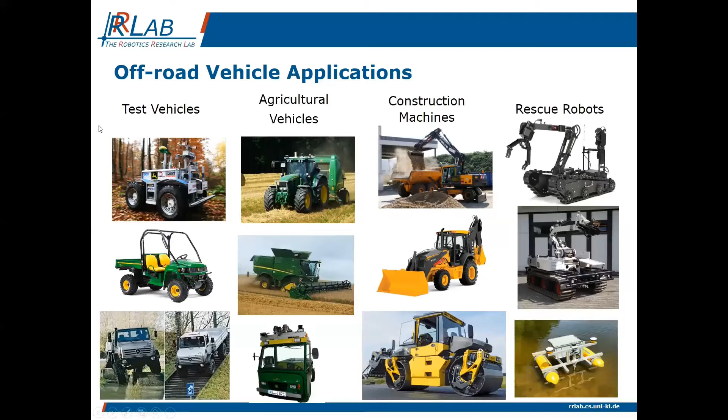Let's come back to the construction. I have here more or less an overview of things what in modern construction should be solved. You see more or less how people see the construction site of the future. So in this, we have, of course, a lot of interaction from the cloud, from different actors which like to interact with the construction site, get data or control the vehicles, deliver new tasks, get information which can be handled to find out if the planning process, what is done, is correct at the moment, and so on.

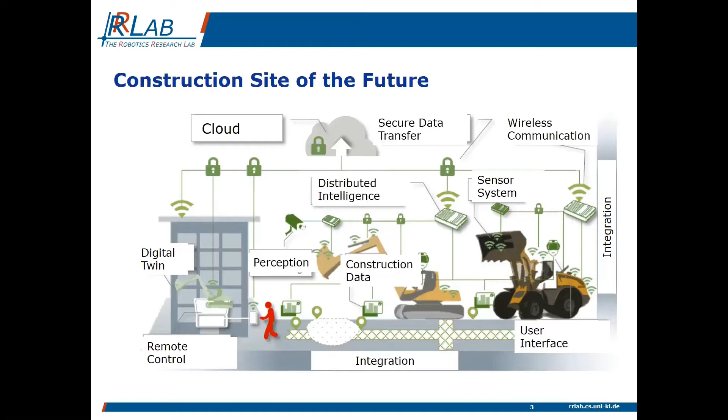So if you look at the middle, you have, of course, the things what we like to support. This is more or less the construction machines. They must be at least semi-autonomous. Otherwise, you will not have a nice production or construction in future. But also you should have on this construction site additional installed sensors. It's not only on the machines, but also we have cameras or other sensors in the construction site itself, which can also be used by the machines to operate in a correct way to get additional information and so on. So this is more or less the scenario in which we normally are.

And of course, you can ask, why do we need in construction now more intelligent machines which can do a lot of operation by itself. The reason is here more or less listed. We'd like to have in future a much higher quality of the construction process. Everyone knows, even someone who has built a house, how low the quality very often is, and how many problems arise because normally manual production is not done in a correct way.

Then we like to have, of course, a much higher efficiency. Think about the huge amount of houses which we like to build in future. There are, of course, countries like China which like to build in a small region more than 1 million houses in a short period of time. So even here we have to have a much higher efficiency than today, and we hope, of course, with such machines we can reach this.

On the other hand side, we like to reduce the resource costs like CO2, energy, and so on. So this is also a very important thing, even in our discussion here in Europe about CO2 pollution, that we have other techniques where we can reduce this. Of course, also on the other hand side, we have to be absolutely safe, even in construction.

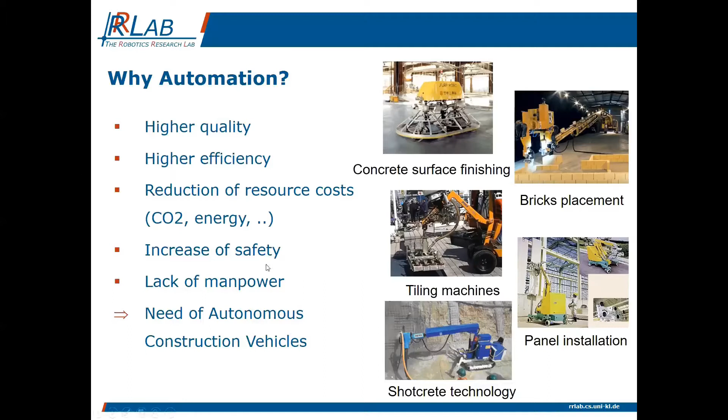But here the ideas, you see a few ideas: concrete surface finishing or brick placement. There were several machines built in the past - the tiling machine, shotcrete technology, or panel installation. These are typical robotic systems where you like to have a mobile machine, but also with an arm, something which manipulates in the construction environment.

The questions which arise, if you look for such type of applications as we have seen on the last slide, is how should we build such construction machines in future? And it's clear, if you have no human in the loop, maybe outside in a monitoring center but not on the machine itself, you need no cabin. So you can also produce, from the mechanical point of view, from the design point of view, the machines in a totally different way than today.

And you see here two examples. One was by Volvo, this mobile cart. So this is of course a truck, but as you see, a totally different structure of a truck. And we were involved in the development of this BOMAG roller, which is also not having any cabin and is also driving in an autonomous manner.

We also can ask about the mechatronics concepts and the embedded systems. How can we develop such concepts so that also industry can buy this at the end? Of course, if you look at our prototype machines, they are very often very, very expensive, so this is not a market. We have to reduce the cost of both the embedded system, the control system, but also the sensor system. At the moment, these prototypes cannot be sold on the market because the price would be too high.

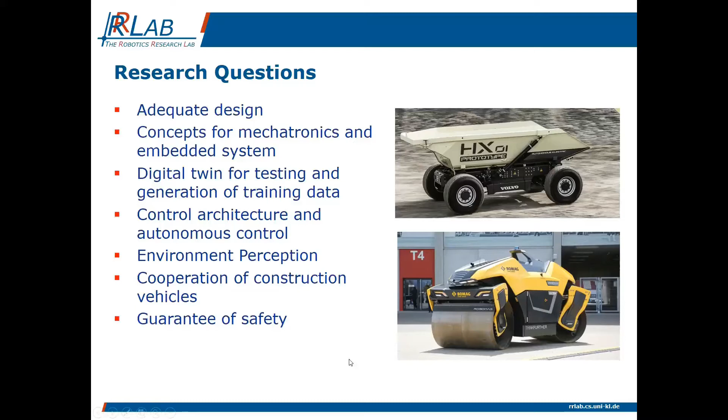So simulation, why is simulation so important for us? Maybe I can also run the video, hopefully it can be seen, these videos in parallel. We like to have simulation because it's impossible to test in a rough outdoor environment. You see here in a natural environment, but also in a street environment, our controllers, our perception system in an adequate way.

Because you cannot go out infinitely with your machine and test this - this is impossible. And everyone who has real machines and goes out knows that we can test only a little bit if we go out. And even if we are out for a longer time, what we really can test is nearly nothing. For example, if you think about perception, it's important if the light condition changes, if the shadow changes - we have totally different behaviors of the perception.

And we like to find out if even under these conditions, the system will work. On the other hand, we are also interested, as all people in the perception area are, in using deep learning networks where we have to generate training data. And we know that it is very hard to generate this training data.

We also worked together with Unreal Engine to generate directly such simulation training data, which we have, of course, not to tag ourselves. We can make this in an automatic way, for example, persons running around under specific conditions. We can also make snow or other light conditions or even dust, and test what the sensor quality is. This hopefully in future will help us tremendously. We have very nice first results where we can test or generate this training data.

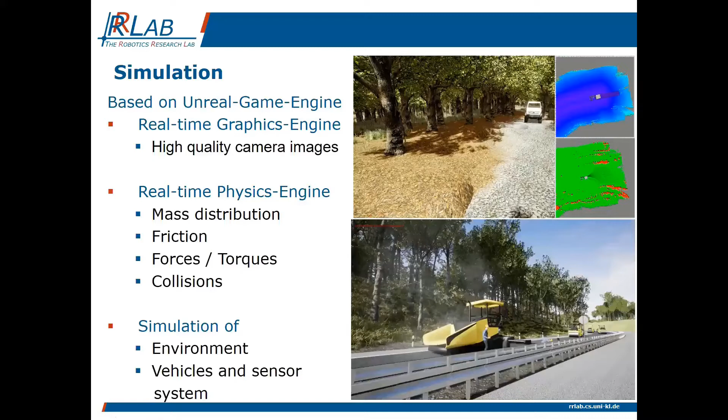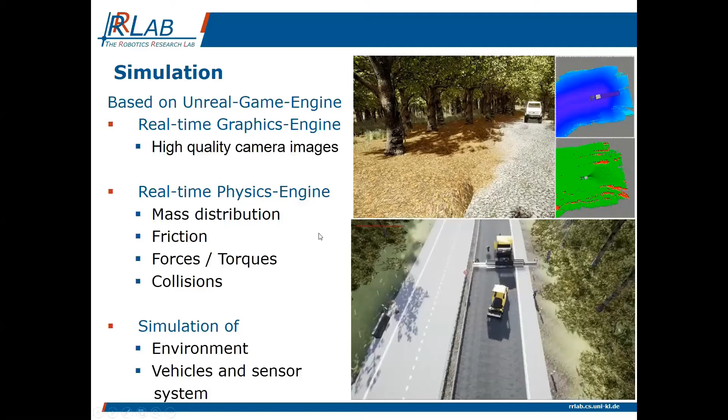We have a lot of environments in the meantime, with different construction but also agricultural environments and so on, where we can easily test and change the conditions. That's why we think without such a powerful tool, you cannot solve the problems I have listed before.

Coming to the control, I'd like to shortly introduce our concept of how we control our vehicles. We have a so-called behavior-based control concept and implemented years ago our own behavior-based language, called iB2C. We also have a middleware called Finroc which we use, not some other middleware. Both of course work together, but I'd like to show you here the behavior-based concept.

The idea is how we implement the percepts, the units which recognize the environment, or the controllers, which are on a low-level control but also high-level control, are these modules you see on the right side. The behavior model is first of all totally free in what we put in. This can be very complex, a neural network, or a very simple function. We say nothing about what is really inside this behavior box, because we also have to use standard algorithms we find on the internet, so we are totally open about what goes in.

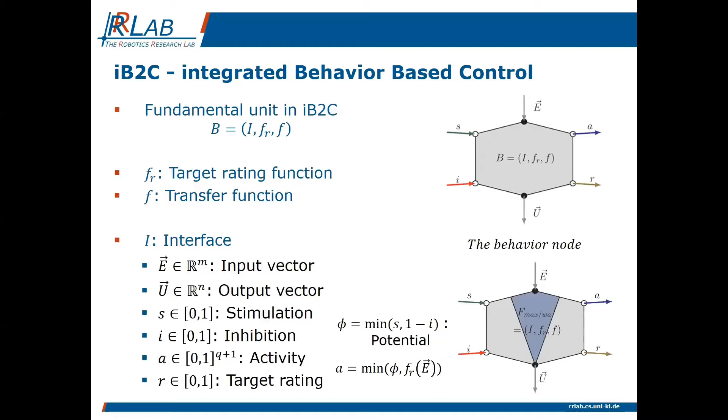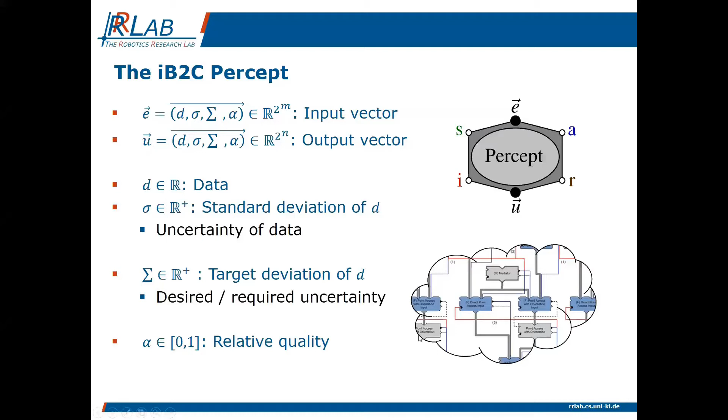We have to look at the application itself. If, for example, the control must not be too precise, and 1 meter is enough, this sensor is perfect, so this deviation is not bad. But if we want to navigate in centimeter dimensions, this deviation is of course terrible. So we consider this deviation according to the application itself and calculate a kind of confidence value, how confident this perception is, which is what we later use. Here, over this iB2C, we have now developed our REACTiON architecture.

This is also used in all of our robots. This has more or less a similar structure as all these control architectures we see in other robotic systems. We have, of course, here this typical control part, the red ones.

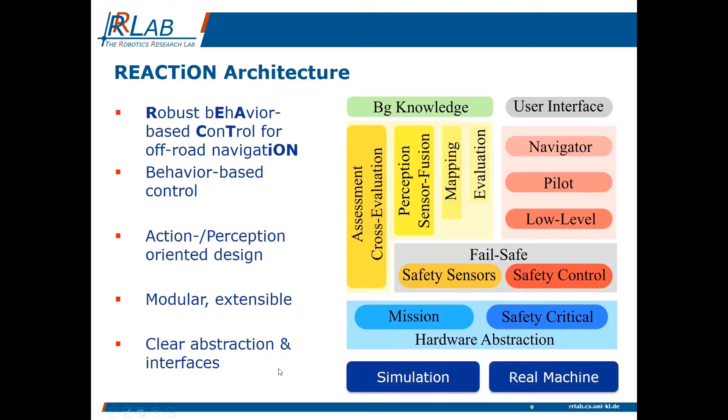We have the perception part, these are the yellow ones, where information from a database or knowledge can go in. We have then an abstraction layer, which can be used to control the simulation and the real machine. So all our algorithms can switch or run this in parallel, it doesn't matter. We can directly go to the real machine, to the simulated machine, or run both together. So this is the concept we have.

And I'd now like to say a few words about our Unimog. This is a typical transportation system for rough terrain. You can use it on a construction site, but also in forest or agricultural applications. We have developed this machine in the last 4 years.

We put a lot of sensors on it. You see a lot of laser scanners on it, but also a stereo camera system, and of course inclination sensors and so on, GPS and whatever is on such a machine, but that's not so important at the moment.

What we have to do to drive this vehicle in very rough terrain is to control the high degree of freedom of this vehicle. This is not easy because you can control a lot in such a Unimog. You see here on the left-hand side the differential lock, what you can control, gearbox, tire pressure, frame bend of 60 centimeters. This is very important for going on rough terrain.

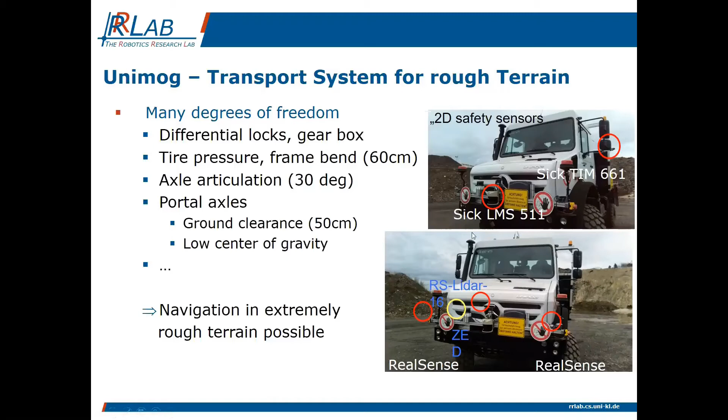Articulation, which has a maximum of 30 degrees, and we have portal axles, ground clearance of at least 50 centimeters and so on. So we can control a lot of parameters depending on what we recognize from the environment. Now the question is, how can we control this and how can we more or less perceive the environment in such construction site areas in a correct way.

Now I come back more or less to this perception node, how we do this. You see here now the measurements of these different laser scanners. Here only the laser scanners are shown. But all these laser scanners which we put on the machine have, of course, different areas where they normally measure, but there are also overlapping areas.

The main problem is that in this overlapping area we have different quality of measurement. So even within a laser scanner we have really different qualities. This is the precision, this is for example the distance where later on the measurement will be not so perfect. So we model this more or less with the typical diameter of the beam itself, the distribution where we measure, and the min-max range we measure.

This goes into the model to calculate at the end the confidence of each measurement in the cells. So we structure the environment around the vehicle in voxels, and then describe the confidence of all these measurements according to the quality of the sensor itself.

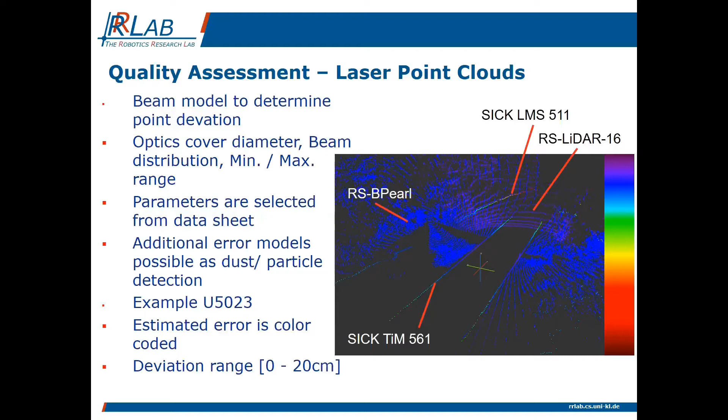So what can we do now with it? This is another aspect. We have to get rid of a lot of disturbances. For example, when we go on such a construction site area, we generate a lot of dust, and this can also lead to some problems. You see this here, and we have to get rid of it.

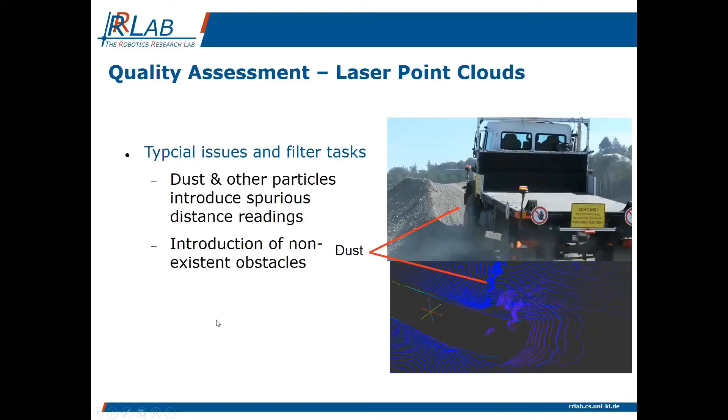We do a lot of experiments on how to get rid of it. The latest, not finished work, is done with a master thesis where we'd like to train a neural network to reduce the dust out of this 3D measurement from the laser scan.

If you see the stereo point cloud, maybe I'll speed up a little, you see that the quality of this measurement is not comparable with laser. Of course we know this. And we know also that at far distance, you see this here, the sigma point cloud, sigma is what we have in our behavior nodes, is getting worse and worse.

Here the colors, if they are blue or green, this is okay from the confidence of the measurement. If it goes to red or even to brown values, it's getting more and more terrible.

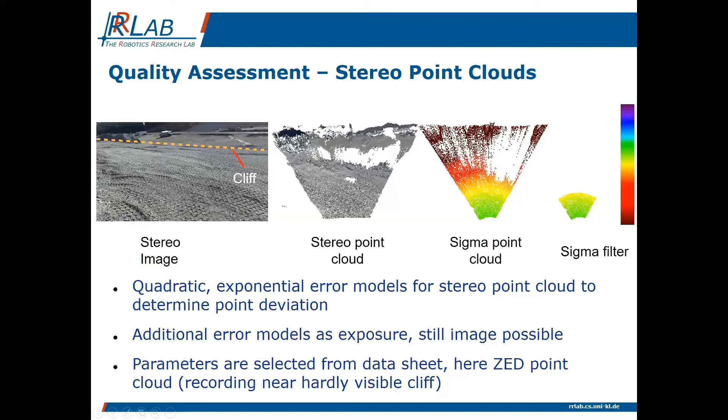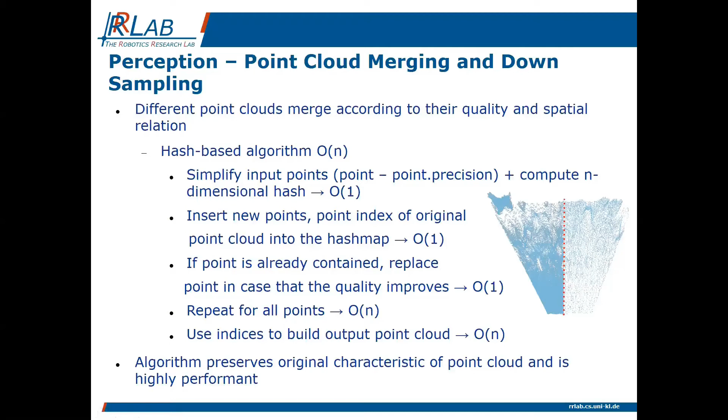And we can now use this for the fusion process. I won't go into detail of this hash-based algorithm, the O of N algorithm. But what we do is estimate the confidence based on these ideas from the data sheet, and then, where we have overlapping measurements from different sensors in a voxel, we extract the one measurement with the best confidence value. So we reduce the basic measurement to fewer points but generate high confidence values.

You see this here on this example. The yellow ones are not very confident - this comes from stereo image processing. The blue, which is very confident, comes from laser processing. Now we have a situation with an overlapping field, and we can make the trick: if we have in a voxel only a stereo point, we use it, but if we also find a laser point, we will replace it with the laser point.

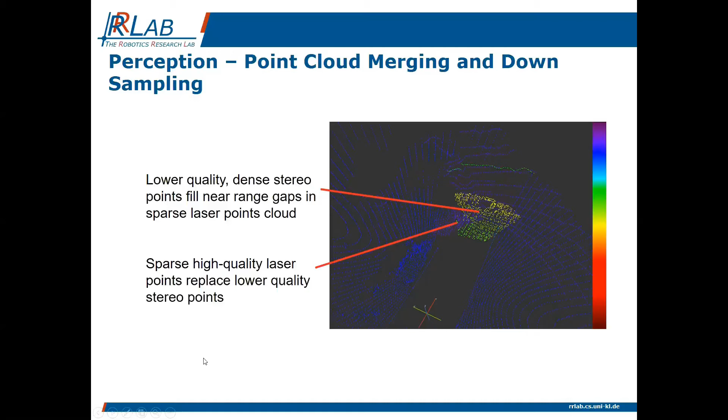This is how we can build, on one hand, a nice 3D measurement of the surrounding, and on the other hand, we give every measurement a confidence value. This confidence value can then be used for the control.

We have a video, but I have no time to show it now. Later on, if you go under YouTube, you will find the video there showing the same experiments again.

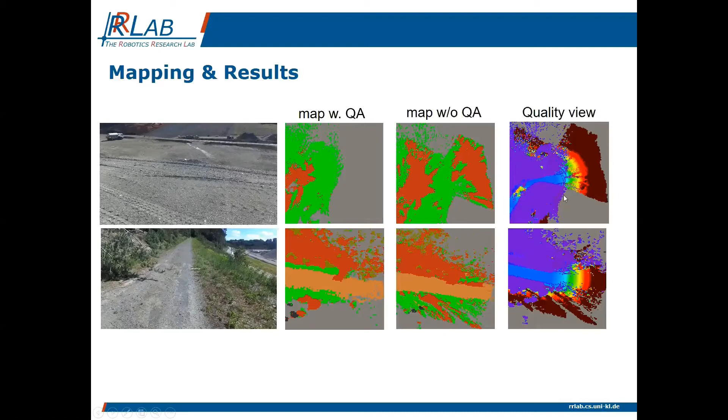Here you see the quality view - what is more or less safe from the measurement and what is very risky. In this case, this part is very risky, and the blue part is where we can drive. Based on this, we can use it for the control, so we not only get the measurement, but also the confidence value for the measurements.

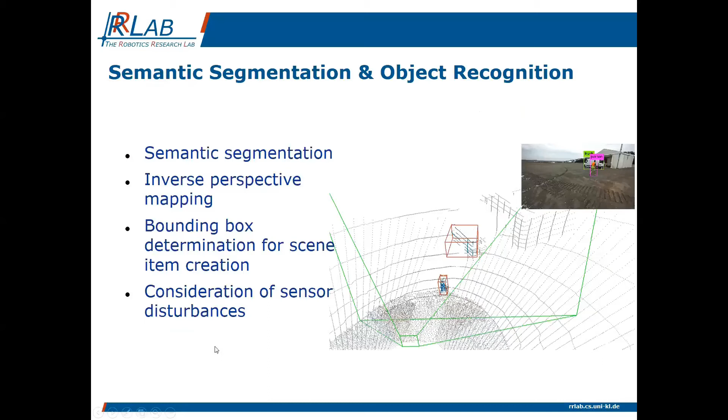From these units which we measure, we can then make a semantic segmentation. This is also what we have done - we can easily extract boxes where objects are and classify these boxes into semantic features. These semantic features can then be used for describing ontologies.

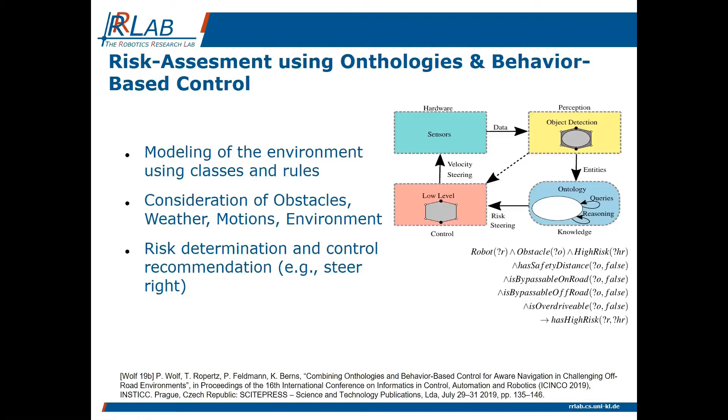We have defined rules where we can say something if a combination of features appear that makes a situation more risky. Let me give an example - a simple simulation where ahead of the vehicle we recognize two pedestrians. If a pedestrian is coming, we don't know how the pedestrian behaves, so this could be a more risky situation than if at the same position an object is measured.

So we can use such a rule for reducing the speed much earlier. Otherwise, normally we go ahead and then only brake in the near range. But we can now do this another way.

Another example: if the situation is wet and I have a meadow on the right or left-hand side of the pathway, we will not drive too hard on the meadow because we can slip away. So we have a different behavior for a wet situation versus a normal situation, and this comes out of rules.

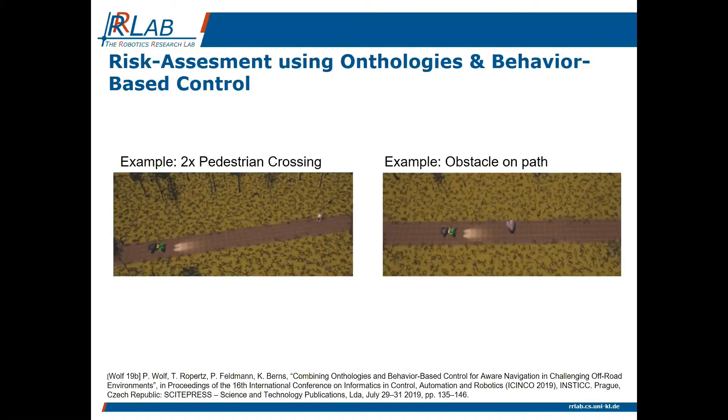So we couple what we recognize and what we calculate from our behaviors with information from the database, which also influences the control itself, and both together produce the reaction.

I skipped this, as I said, have a look at this experiment - we have it under YouTube. You can start this directly. If you go to YouTube, RR Lab, you will see this.

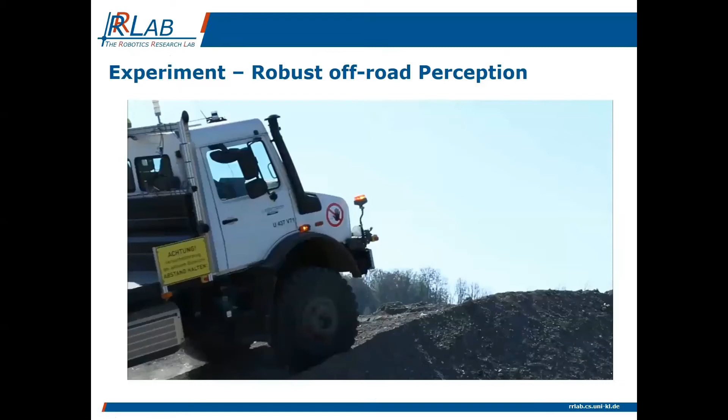Maybe at the end, three other examples we worked on last year - we stopped at the end of last year. This was the drum roller project. Here it was important to navigate a fleet of drum rollers behind this production machine, and we can add or reduce drum rollers. Important is, as you see in the first video, that we have to cover the area in a specific time range.

We can only move over it and compress the concrete or whatever it is - could be bitumen. If you run out of time, the operation is useless. So you have to guarantee, by making a plan, that you coordinate the machines in the right manner so that this is possible.

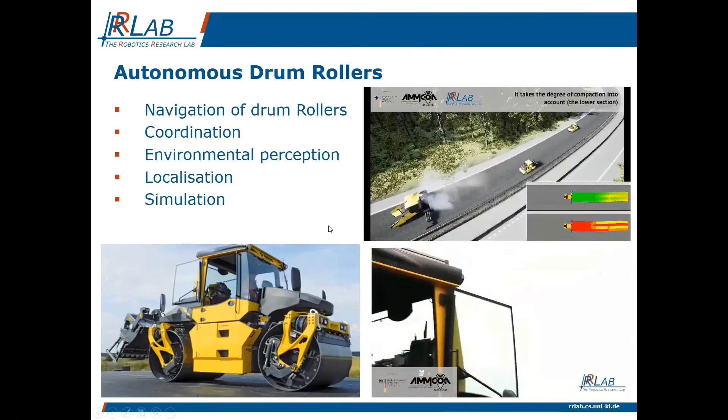We recognize if we have a trench, for example, which we like to dig - we like to recognize the environment and the situation. We measure how easy it is to move through the sand or whatever material, and then also decide to change the trajectory.

What is also important is, later on, if you have a bigger site where you like to get rid of the sand, from where do you dig? Here we have also made a concept so that automatically we know where to take what out of the earth, to get at the end a fixed construction.

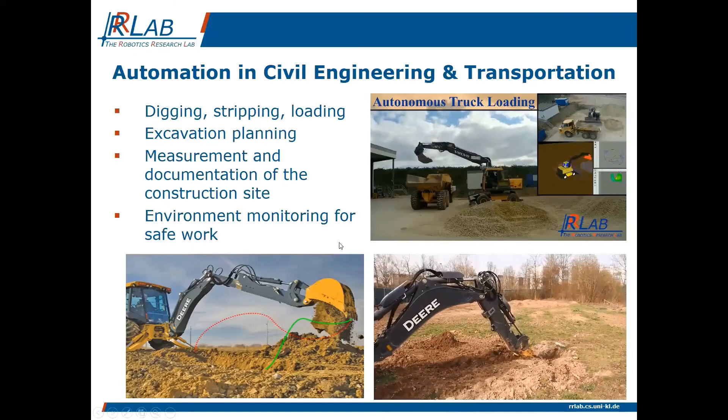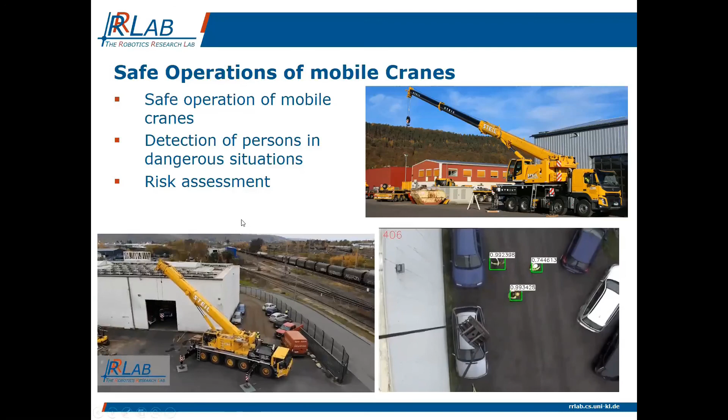We really detect and separate people from other objects which look similar. So I think I have to stop. Thank you very much for your attention, and if you have questions, please ask.